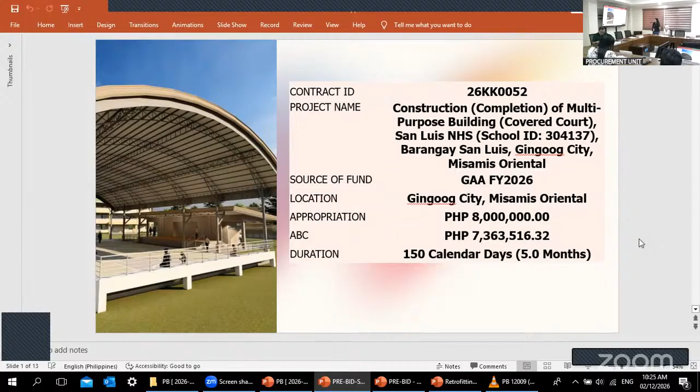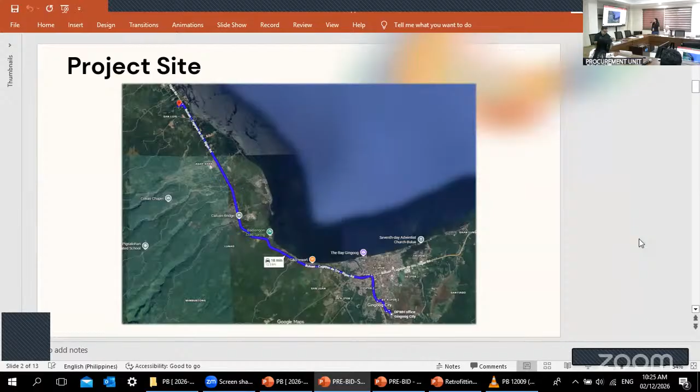Next, please. This is the project site, approximately 12.3 kilometers away from the DPWH office. Here is the site development plan and site photos. As you can see, there's an existing covered court, and the gutters and downspout are damaged.

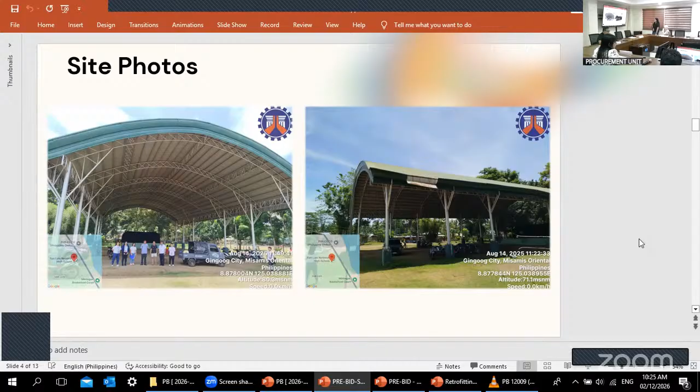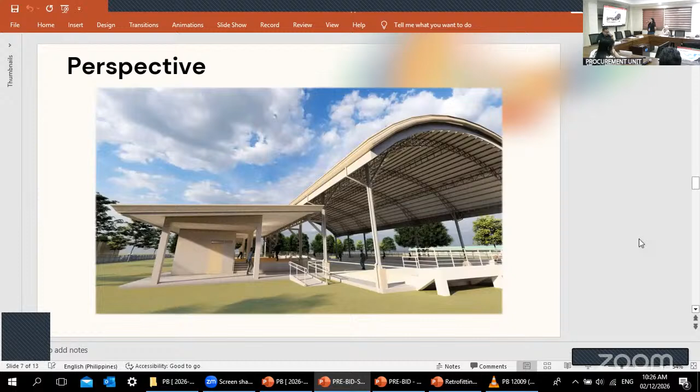For the project scope: for the existing covered court, we have construction of slab on grade, concrete drainage canal, rubber-based coating for the slab, and removal and replacement of damaged PVC downspout and GI gutter. For construction of the stage, complete structural members including reinforced concrete footings, columns, beams, and slab, roof trusses and roof sheets including all roofing accessories, fascia frame, fascia board, gutter, downspout, and flashings, complete masonry works, and semi-gloss painting finish on columns, beams, and stage walls.

Complete doors and windows, complete ceiling works, complete ramp with railings, complete tiling works, complete septic tank, complete plumbing and sanitary works, and complete electrical works. For the bleachers, we have complete structural members, reinforced concrete footings, columns, beams, and bleacher slab, rubber-based coating for the bleacher slab, and complete stainless steel railings.

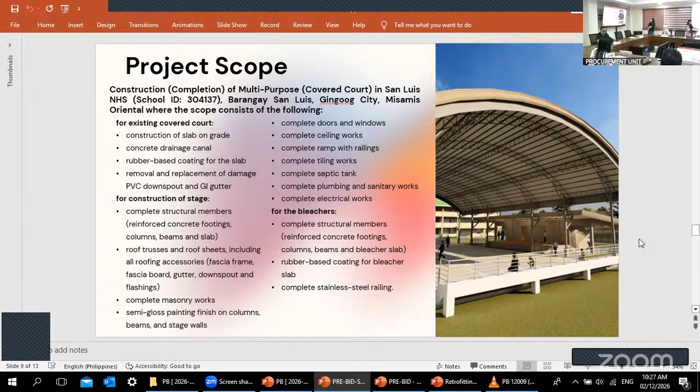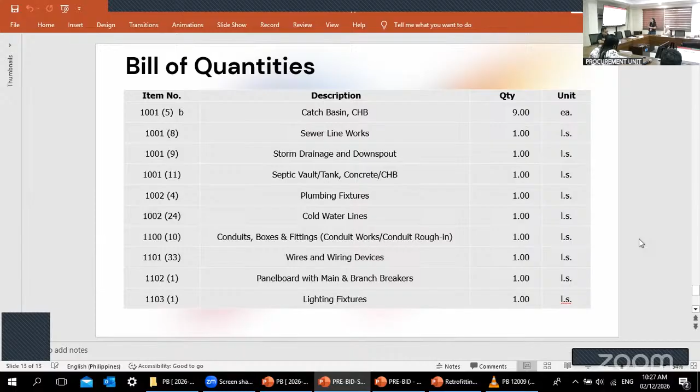So these are the bill of quantities. That would be all for this project. Are there any questions or clarifications from our YouTube viewers? Done. It's done, so we proceed with the other.

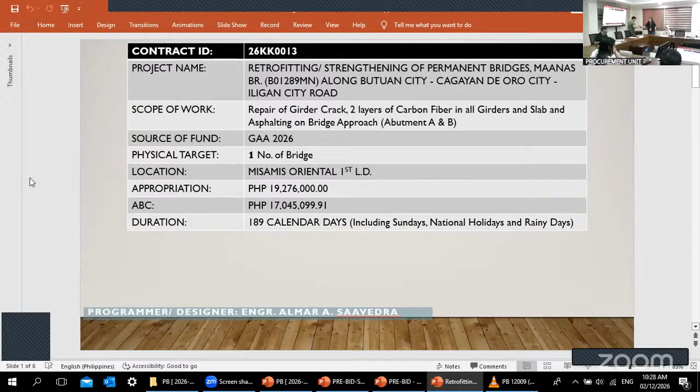As for the next project, we have 26KK0013, retrofitting and strengthening of permanent bridges, Maanas Bridge, Bridge ID B01289, along Butuan City-Cagayan de Oro City-Iligan Road. The scope of works includes repair of girder crack, 2 layers of carbon fiber in all girders and slab, and asphalting of the bridge approach. The appropriation is 19,276,000 with an approved budget cost of 17,045,099 pesos and 91 centavos, with a duration of 189 calendar days, which includes Sundays, national holidays, and rainy days.

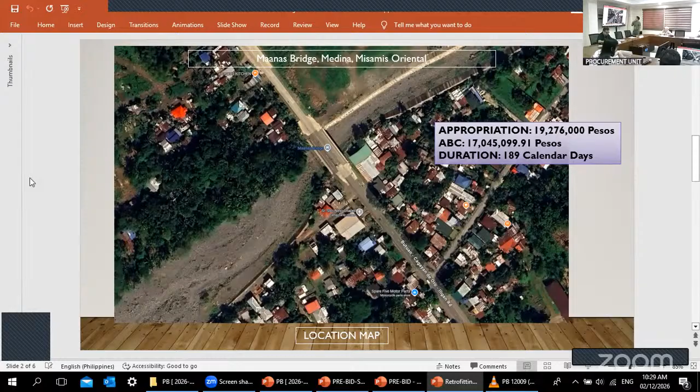Next, please. This is our Maanas Bridge located at Medina, Misamis Oriental. These are the photos taken during the survey and validation. As we can see, there are cracks that need to be repaired through epoxy structural concrete injection. We also have some girders and slabs that need to be strengthened using carbon fibers, carbon fiber plates and sheets.

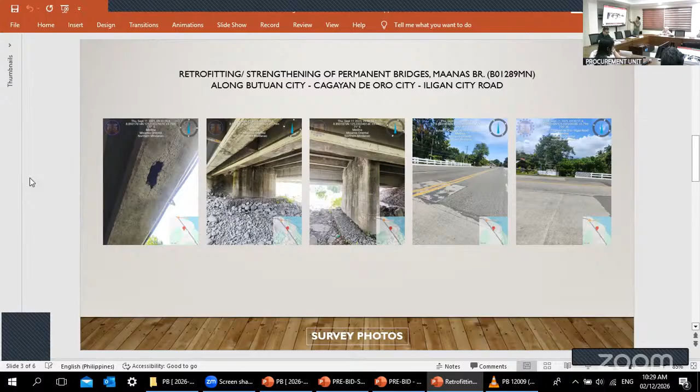Next is the asphalting of the approaches. As for the specifics, the girder cracks will be repaired using structural concrete epoxy injection, and there will be asphalting of the bridge carriageway, which is the center lanes of the bridge. There will also be asphalting of the bridge approach at stations 1327 plus 750 up to 1327 plus 864, and 1327 plus 903 up to 1327 plus 970.

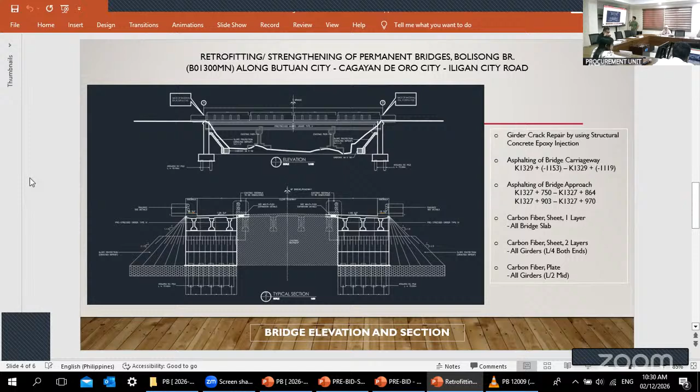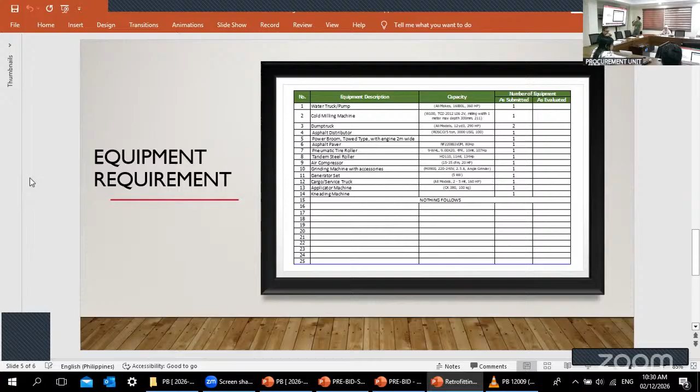For the carbon fiber, we will use one layer of sheet for all bridge slabs, and for the girders, 2 layers of carbon fiber sheet plus carbon fiber plate. Next, please, these are the equipment requirements for this project. And these are the specific bill of quantities.

So first, for the civil works, we have project billboard and signboard, occupational safety and health, traffic management, mobilization, demobilization, general scaffolding and shoring for the installation of the scope of works under our bridge, and removal of actual structures and obstruction, 0.1 meter thick ACP, the damaged asphalt on the bridge carriageway, and removal of the asphalt. Next is the emulsified asphalt, bituminous concrete surface wearing course.

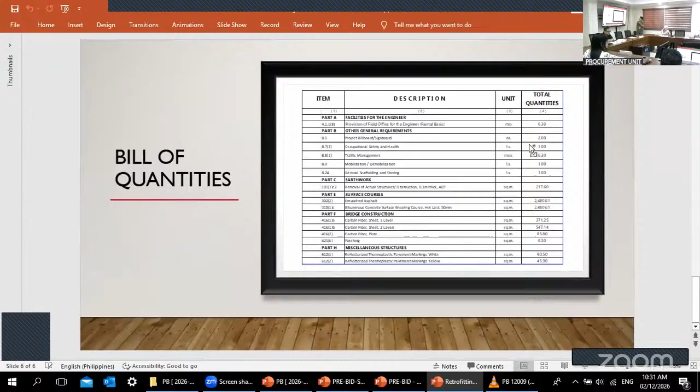We have carbon fiber sheet, 1 layer for the slab and 2 layers for the girders, and carbon fiber plate also for the girders. This item, patching, applies to the structural concrete epoxy injection. We also have reflectorized thermoplastic pavement markings, white and yellow, for the bridge asphalting. So that would be all for the project.

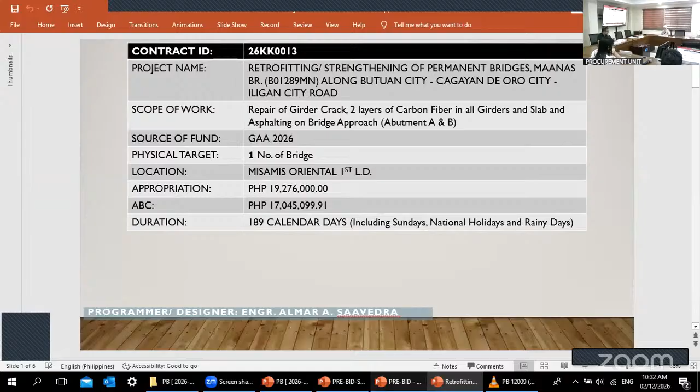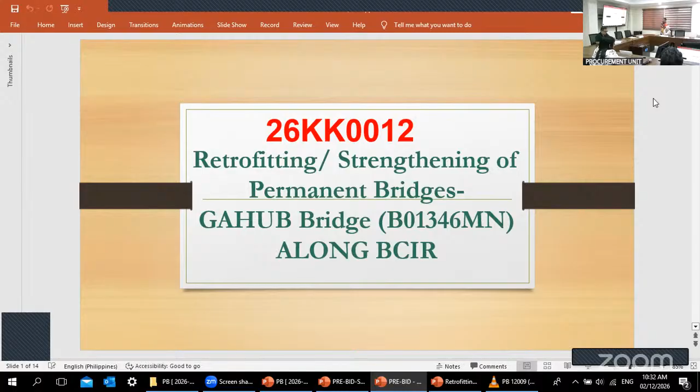Good morning, everyone. For the project 26 KK 0012, retrofitting and strengthening of permanent bridges, Gahub, B01346MN along BCIR. For the location, Gahub Bridge is located at Gingoog City.

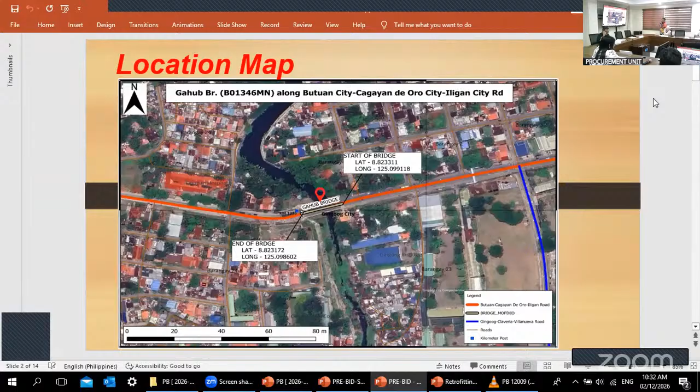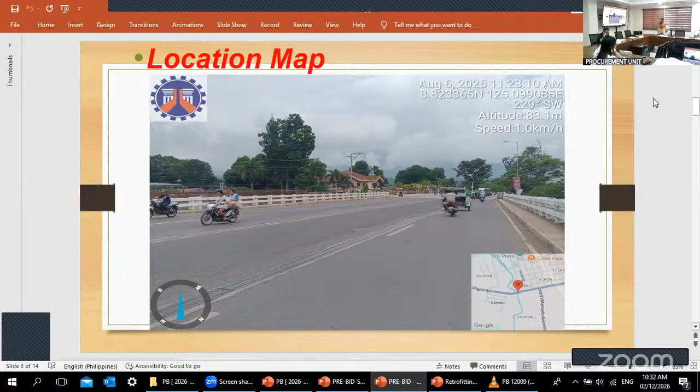This is the picture of the Gahub Bridge for our repair. For the bridge length, it is 62.67 meters with an appropriation of 19,276,000 and ABC of 17,192,508.43. Project duration of 143 calendar days, source of fund GAA.

This is our scope of works. We have carbon fiber at the center lane, carbon fiber sheets, and carbon fiber plates.

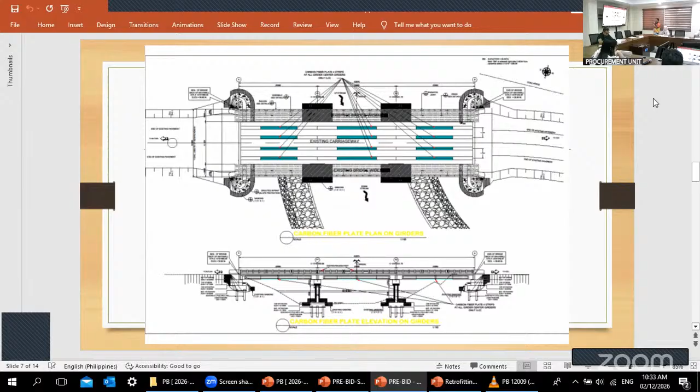We have also carbon fiber sheets at center, at the center on the slab. This is the carbon fiber plate for girders at the carriageway. This is the section for the carbon fiber sheets on slab, 1 layer.

Then carbon fiber sheets on center girders, 1 layer, L over 4 at both ends. And carbon fiber plates, 4 strips at all girders, center girders only.

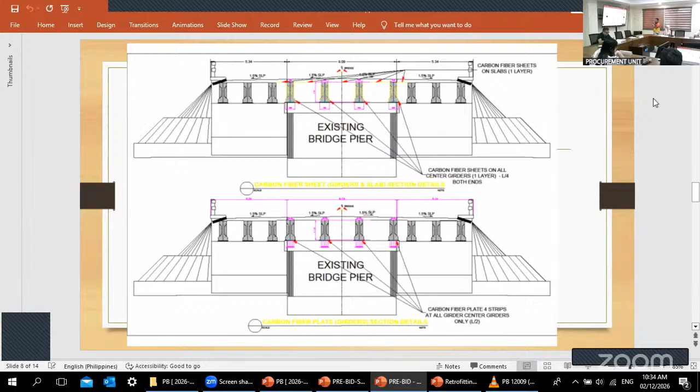The next scope of work is removal of asphalt, 0.05 meter thick, as we can see, at the tolling on the carriageway of the bridge, with a width of 10.6, length of 62.67, and approach A length of 168 meters and width of 15.6.

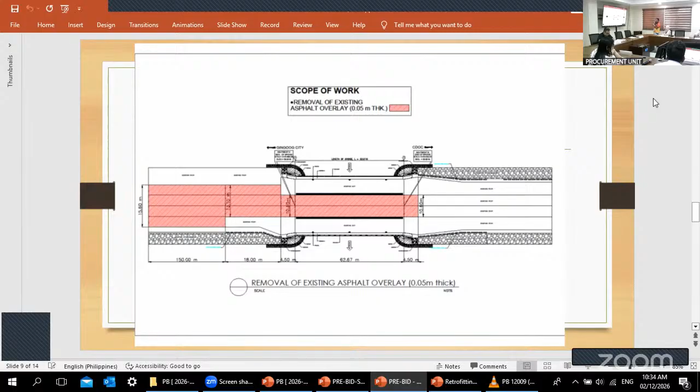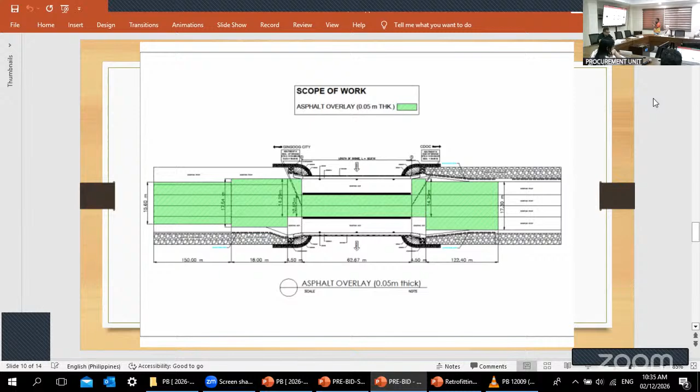Also a scope of work of asphalt overlay, tolling on the carriageway of the bridge, then approach of 122.4 on approach B, and approach A of 168 meters.

The next work is PCCP shoulder with a length of 65.7 meters, 2 meters width, and wheel guard installation of 27 units.

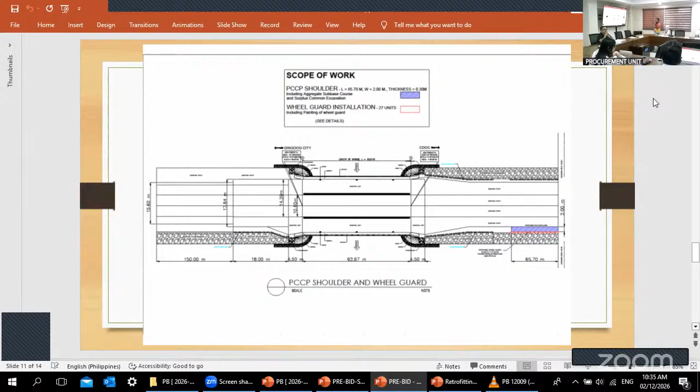Also scope of work of reflectorized pavement markings with a length of approach A 172.5 meters and 62.67 on the bridge, and approach B of 126.9, with thermoplastic yellow and white.

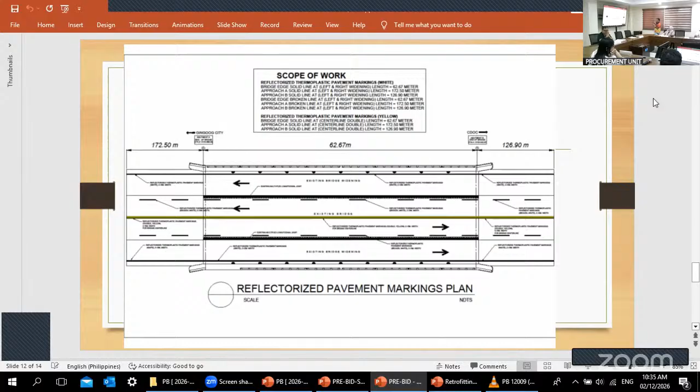This is the item of works: field office for the engineer, project billboards, occupational safety and health, traffic management, mobilization, demobilization, general scaffolding and shoring, removal of actual structure obstruction 0.05 meter thick asphalt, surplus common excavation, aggregate subbase course, emulsified asphalt, bituminous surface, concrete surface wearing course 50 mm, PCCP, unreinforced 0.3 meter thick, paint, carbon fiber sheets 1 layer, carbon fiber plate, stone masonry, reflectorized pavement markings white and yellow, and lastly concrete joint sealant, hot poured elastic type.

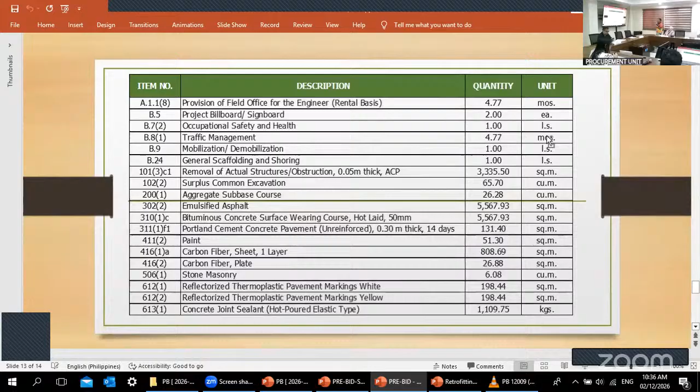That's all. Thank you.

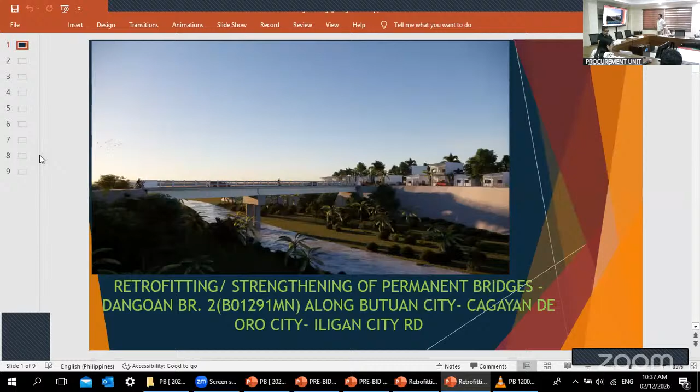Next project, retrofitting and strengthening of permanent bridge, Dangoan Bridge 2, along Butuan, Cagayan de Oro, Iligan Road. With contract ID of 26 KT 0010, bridge length 52.5 meters, located at Misamis Oriental, with appropriation of 19,276,000, ABC of 17,150,272, duration of 160 calendar days including Sunday, national holiday, and rainy days.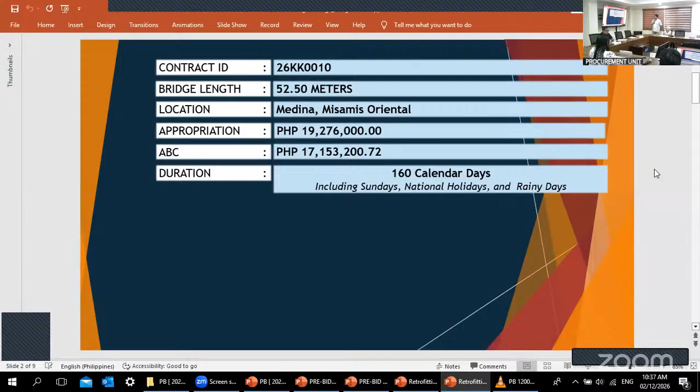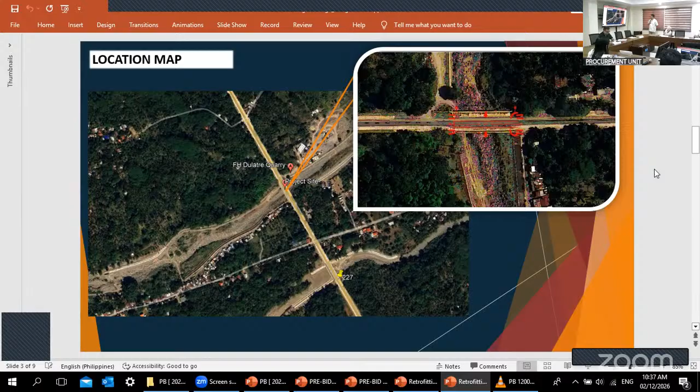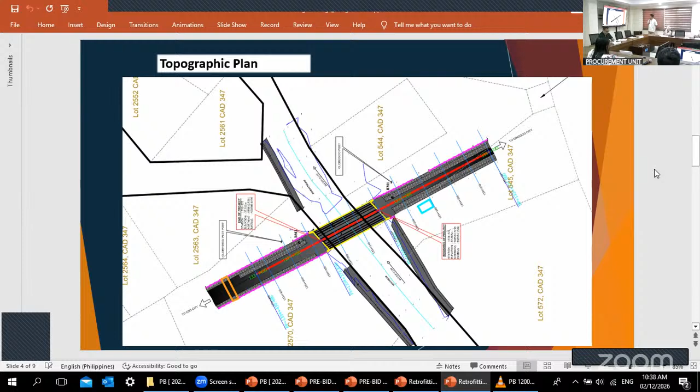This is the location of the project near Dulatre Quarry. This is the topographic plan, the yellow one is the Dangoan Bridge 2. This is the scope of the project, the blue one is the girder.

So for this bridge, there are 3 spans. Only 6 girders have 2 layers of carbon fiber sheets, then 1 strip of carbon fiber plate.

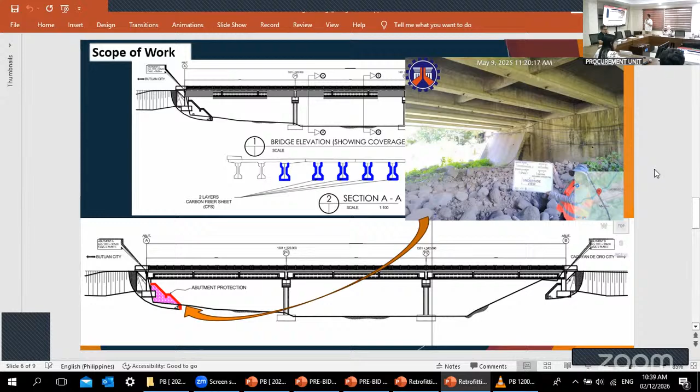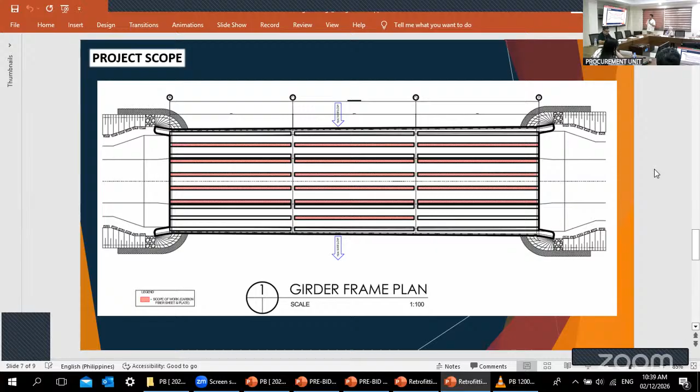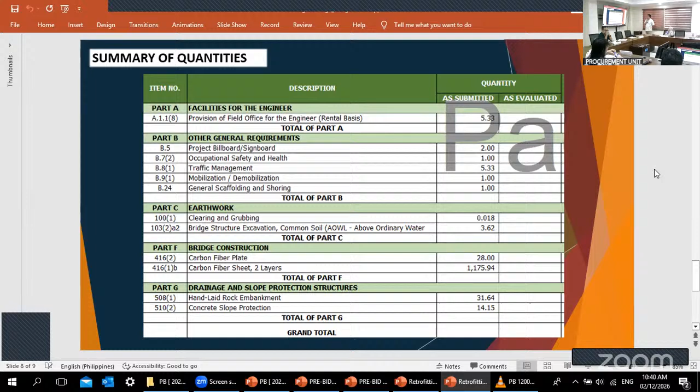So these are the quantities for civil works: clearing and grubbing, bridge structure excavation, carbon fiber plate, carbon fiber sheets 2 layers, hand-laid rock embankment, and concrete slope protection. These are our pictures taken at the bottom of the bridge, underneath, and on top - Dangoan Bridge 2, Station 1331 plus 321. That's all. Thank you.

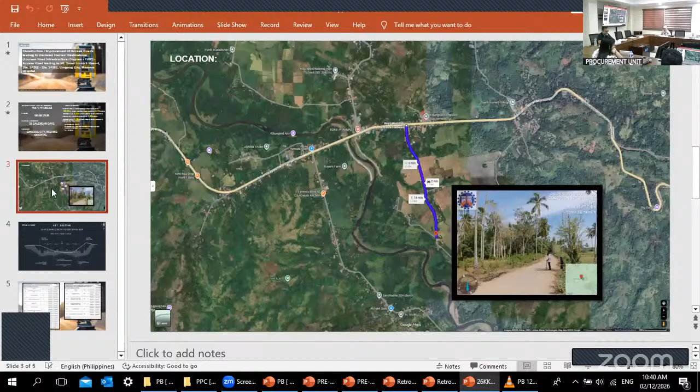The next project is 26-0015, construction improvement of access roads leading to declared tourism destinations. Tourism road infrastructure program 3, access road leading to Mount Sioan Resort, Station 3 plus 262 to Station 3 plus 362, Gingoog City, Misamis Oriental.

With the ABC of 4,144,285.68. The length is 100 linear meters. Contract duration is 50 calendar days. Location is Gingoog City, Misamis Oriental.

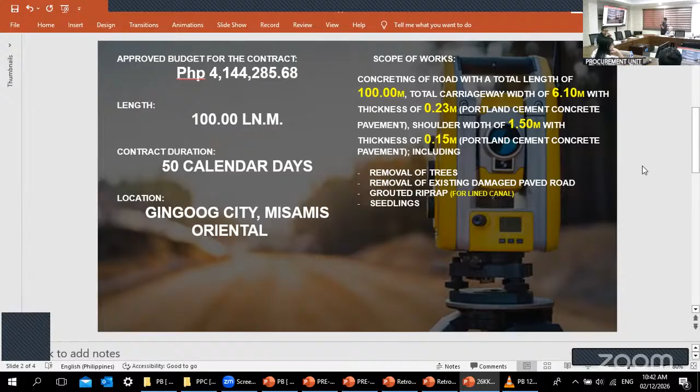The typical cross-section is full throughout the project. We have 3.05 plus 3.05 for the carriageway, 1.5 meters left and right for shoulders, then canal on both sides.

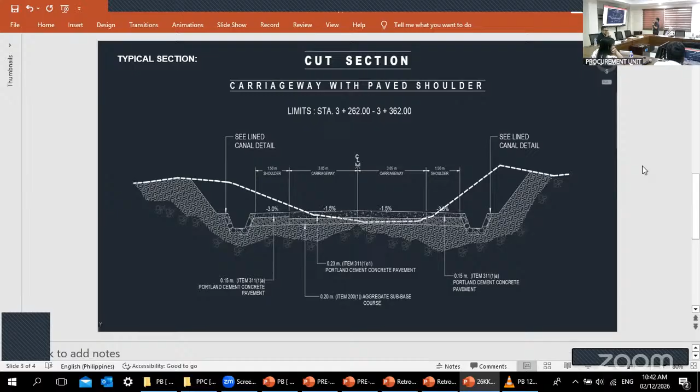So we have the bill of quantities. We have 1.67 months for field office for the engineer. Billboard is 5. Traffic, 1 lump sum. Removal of trees, 6 pieces. Removal of existing damaged paved road is item 101.

Surplus common excavation, item 102. Embankment, item 104. Item 105, preparation of subgrade. Aggregate subbase course, item 200. Item 311(1)a for the shoulder. 311(1)c1 for the main carriageway. And item 505 for the lined canal. Then item 611 for the seedlings.

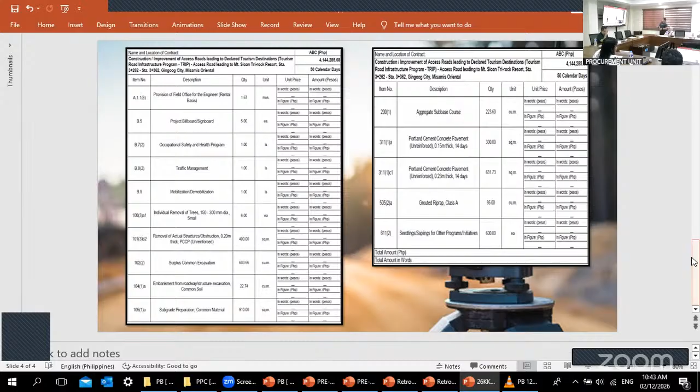Okay, thank you, Engineer Daguimol.

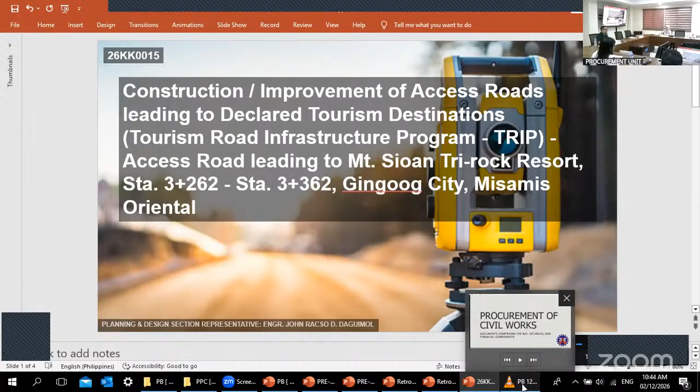Since we are done with the scope of the project, before we proceed with the documents of the technical and financial component for the checklist, any questions from our interviewer? Still none, so since there's no question, okay, we proceed with the technical and financial component.

Documents comprising the bid: technical and financial components. For the eligibility requirements, bidders are required to submit the following documents.

First, a PhilGEPS certificate of registration under platinum membership. Second, a statement of all ongoing government and private contracts. Third, a statement of the bidder's single largest completed contract or SLCC. Fourth, the bidder's computation of the net financial contracting capacity or NFCC. Finally, for joint ventures, a joint venture agreement or JVA in accordance with Republic Act number 4566, otherwise known as the Contractor's License Law, and its implementing rules and regulations.

Please be reminded that failure of the bidder to update their PhilGEPS certificate of registration with current and updated supporting documents shall result in the automatic suspension of the bidder's certificate.

For the single largest completed contract, or SLCC, the bidder must have completed a contract similar to the project we bid. The value of the SLCC, adjusted to current prices using the PSA consumer price indices, must be at least 50% of the approved budget for the contract to be bid. However, contractors under small A and small B categories who do not have similar experience may still be allowed to bid, provided that the cost of the contract does not exceed the allowable range of contract cost of their registration, in accordance with PCAB guidelines.

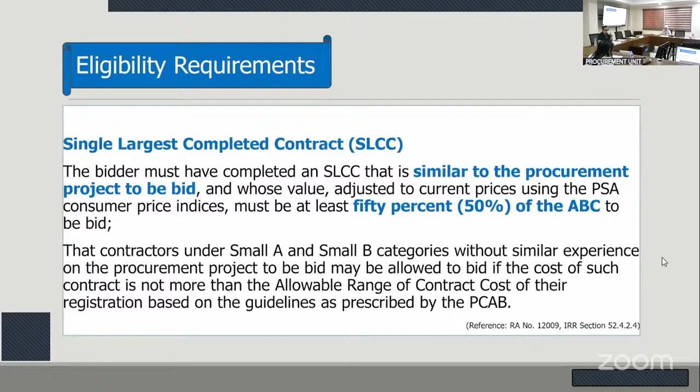Please note that the SLCC must be supported by an owner's certificate of final acceptance issued by the project owner other than the contractor. Alternatively, a final rating of at least satisfactory in the CPES or a similar performance and monitoring system may be submitted. For contracts with the private sector, an equivalent supporting document shall be required.

For the net financial contracting capacity, or NFCC, the bidder's computed NFCC must be at least equal to the approved budget for the contract to be bid. The NFCC is calculated using the prescribed formula, as shown. The values of the current assets and current liabilities of domestic bidders shall be based on their latest audited financial statements.

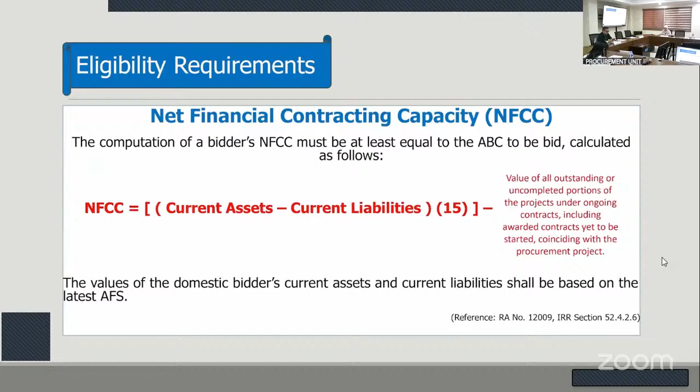Joint ventures may participate in the bidding process, provided that the primary purpose of each member is similar or related to the requirements of the project. Each member of the joint venture shall be jointly and severally liable to the procuring entity in case of any breach or failure to comply with the project requirements.

For the submission and receipt of bids, each bid shall consist of two components: the technical component and the financial component.

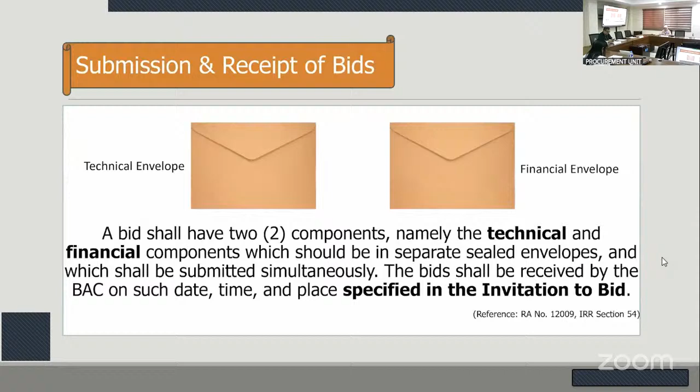These components must be placed in separate sealed envelopes and submitted simultaneously. Bids shall be received by the Bids and Awards Committee, or BAC, on the date, time, and place specified in the invitation to bid.

The first bid envelope shall contain the technical documents, which must include at least: a PhilGEPS certificate of registration under Platinum membership; b, PCAB license and registration in case of a joint venture; c, statement of all ongoing government and private contracts; d, statement of the single largest completed contract, or SLCC; e, computation of the net financial contracting capacity, or NFCC; f, joint venture agreement if applicable; and g, bid securities in the prescribed form, amount, and validity period.

H, project requirements, which shall include the following: 1, the organizational chart for the procurement project to be bid; 2, the list of contractors' personnel, for example project manager, project engineers, materials engineers, and foremen, to be assigned to the project, along with their complete qualifications and experience.

3, the list of contractors' major equipment units, whether owned, leased, or under purchase agreements, supported by proof of ownership or certification of availability from the equipment lessor or vendor for the duration of the project.

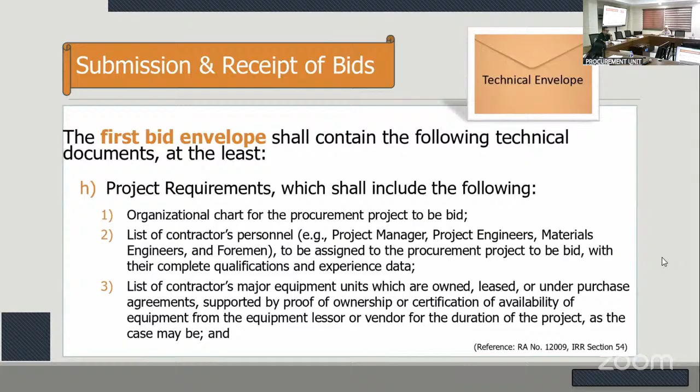4, omnibus sworn statement in accordance with section 54.3 of this IRR. 5, latest general information sheet, GIS, reflecting the beneficial ownership information, BOI, duly received by the Securities and Exchange Commission, SEC, for corporations. And 6, sworn affidavit of eligibility and beneficial ownership, following the template attached as Annex A for all bidders, including sole proprietorship.

The following forms are for your reference.

For bid security, all bids under competitive procurement methods must be accompanied by a bid security. The bid security serves as a guarantee that the bidder will enter into a contract if awarded the project. The bidder shall submit either a bid securing declaration or any form of bid security in an amount not less than the required percentage of the ABC.

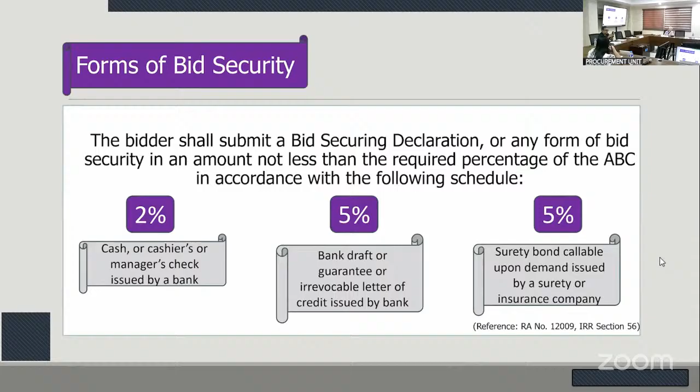According to the following schedule: cash, or cashier's or manager's check issued by a bank, 2% of the ABC; bank draft or guarantee or irrevocable letter of credit issued by a bank, 5% of the ABC; surety bond callable upon demand issued by a surety or insurance company, 5% of the ABC. The omnibus sworn statement must be executed by the bidder or by its duly authorized representative.

It should contain the requirements outlined in section 54.3 of the implementing rules and regulations of RA 12009.

Contractors' key personnel: the key personnel should meet the following number of years' work experience. The experience means total years of civil works experience of any nature in construction and engineering consultancy service. Include the tax identification number, or TIN, of the key personnel.

Compliance to DO 98 series of 2016, revised guidelines on the accreditation of contractors, consultants, materials engineer, and to include the contact number of the materials engineer. Compliance to DO 148 series of 2024, guidelines in the accreditation and assignment of contractors and consultants project engineer.

If a proposed key technical personnel is an employee of the bidder and working on another project at the time of the bidding, the bidder shall submit a certification that: 1, the personnel will be pulled out from the ongoing project once the bidder is awarded the contract; and 2, he or she will be replaced with another person with equal or better qualifications as certified by the head of the implementing office, pursuant to Department Order Number 9, Series 2012.

The proposed key personnel and replacement must be named in the bidding document. The following are the key personnel required: 1 project manager, with 5 years of general experience and 5 years of relevant experience.

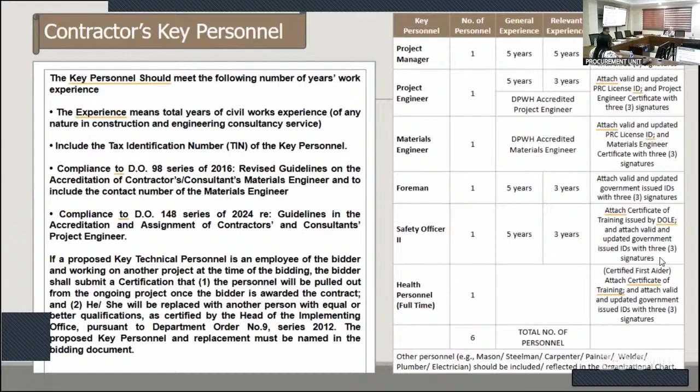For contractors' major equipment units, the contractor must provide proofs of ownership or other supporting documents for equipment that is owned, leased, or under purchase agreements. For leased or purchased equipment, a certificate of availability from the lessor or vendor must be submitted for the duration of the project. Proofs of ownership and supporting documents must specify model and year, capacity, performance or size, plate number, motor number, body number, chassis serial number, engine serial number, specific location and condition of the equipment.

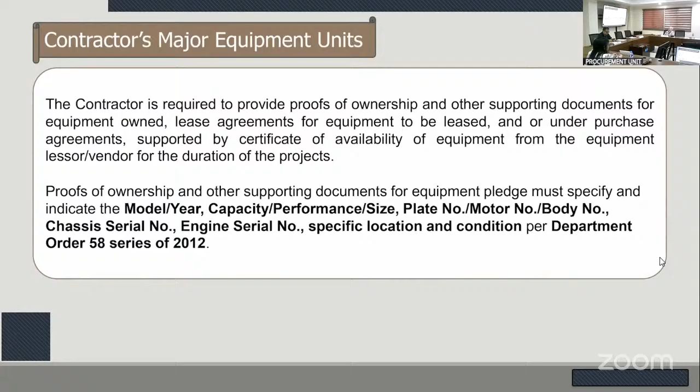These requirements are in accordance with Department Order 58, Series of 2012. For contractors' minimum materials testing equipment, refer to Department Order 11, Series of 2017 for the required equipment.

The second bid envelope shall contain the following financial documents: original of duly signed and accomplished financial bid form, original of duly signed bid prices in the bill of quantities, duly accomplished detailed estimates form including a summary sheet indicating the unit prices of construction materials, labor rates, and equipment rentals used in coming up with the bid, and cash flow by quarter.

Submission and receipt of bids. Bid submission may be done manually or electronically online. However, bidders should only select one mode of submission, either manual or electronic. The address for receipt of bids submitted manually is Back Conference Room, 3rd floor, DPWH MOFDEO, Barangay 26, Gingoog City, Misamis Oriental. For electronic submission, electronic bids Misamis Oriental 1 at dpwh.gov.ph.

Modification of bids. Bidders may modify their bid before the deadline for the receipt of bids. In case of modification, bidders shall not be allowed to retrieve their original bid, but shall only be allowed to send another bid, equally sealed, properly identified, linked to their original bid, and marked as modification and stamped received by the BAC. Withdrawal of bids.

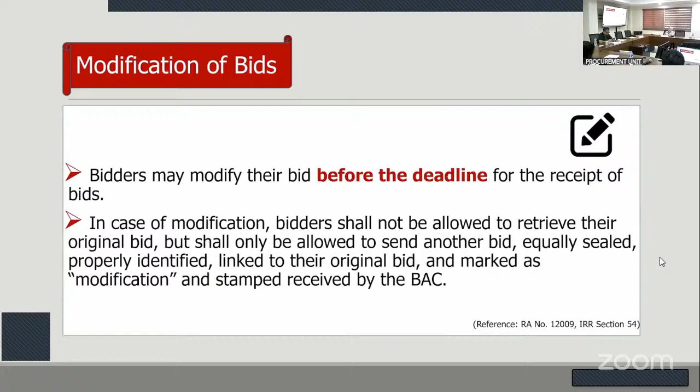Bidders, through a letter, may withdraw their bids or express their intention not to participate in the bidding before the deadline for the submission and receipt of bids. They shall no longer be allowed to submit another bid for the same contract, either directly or indirectly. Withdrawal of bids after the deadline shall be subject to appropriate sanctions.

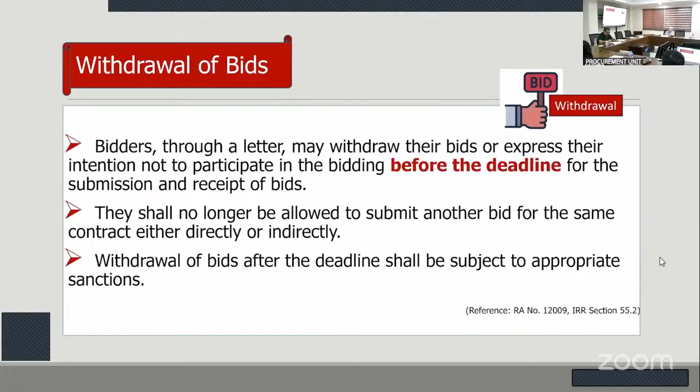The financial component of the bids of each passed bidder shall be evaluated using non-discretionary criteria, including arithmetical corrections for computational errors, and thus determine the correct total calculated bid price. The BAC shall automatically disqualify any total calculated bid price which exceeds the ABC.

The following factors are to be considered in the evaluation of the bid prices. Completeness: no price for a required item due to the government, indicating a 0 or a dash, is free to the government, and all prices are deemed to include all taxes. Bids not addressing or providing all of the required items in the bidding documents, including where applicable the BOQ, shall be considered non-responsive.

Arithmetical corrections: bid prices in figures versus words, words prevail. Total price per item versus unit price for the item as extended or multiplied by the quantity of that item, the unit price as extended prevails. Stated total price versus actual sum of prices of component items, the actual sum of prices of component items prevails.

Unit cost in the detailed estimate versus unit cost in BOQ, unit cost in BOQ prevails. Amount in price schedule versus amount in bid form, amount in bid form prevails.

Post-qualification. Legal requirements: licenses, certificates, permits, agreements, and non-inclusion in blacklist. Technical requirements: key personnel, minimum work experience requirements should be satisfied, availability and commitment of major construction equipment and materials laboratory equipment, and performance in ongoing government and private contracts.

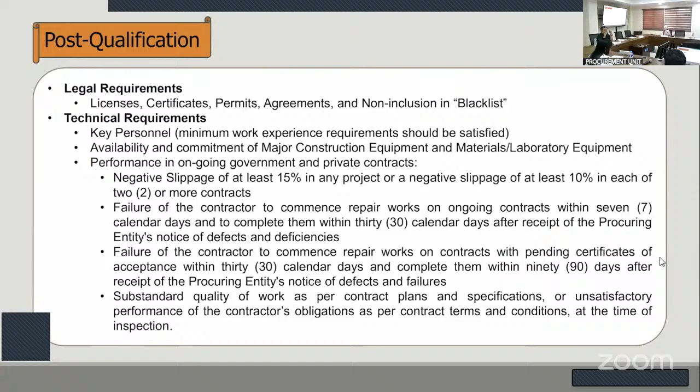Required committed line of credit in the amount specified and over the period stipulated in the bidding documents, when applicable. NFCC, within 5 calendar days from receipt by the bidder of the notice from the BAC that the bidder has the LCB, MEAB, MAB, or HRB, the bidder shall submit all eligibility documents supporting its PhilGEPS certificate of registration, platinum membership, its latest income and business tax returns filed for the preceding quarter, which should not be earlier than 2 quarters from the date of submission and receipt of bid, and other appropriate licenses and permits required by law. The BAC shall recommend to the HOPE the award of contract to the bidder with the LCRB after post-qualification. Within 10 calendar days from receipt by the winning bidder of the notice of award, certain conditions should be complied with before the contract may be awarded.

Submission of the following documents by the winning bidder: valid JVA if applicable, a valid PCAB license and registration for the type and cost of the procurement project to be bid, for foreign bidders in infrastructure projects when the treaty or international or executive agreement expressly allows submission of such license and registration as a precondition to the notice of award, or the SEC certificate of registration of the foreign corporation, or the SEC certificate of registration of the foreign consulting firm, or the authority or license from the appropriate government agency or professional regulatory body of foreign professionals engaging in the practice of regulated professions, where applicable. Posting of performance security by the winning bidder in accordance with Section 68 of this IRR, and signing of the contract by the parties.

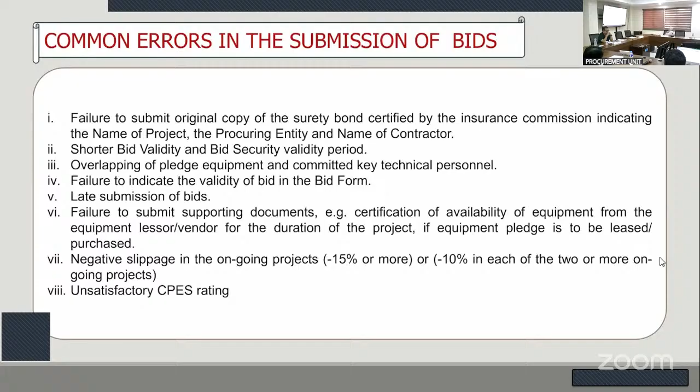Negative slippage in ongoing projects of negative 15% or more, or negative 10% in each of 2 or more ongoing projects; unsatisfactory CPES rating; incomplete pages of bid documents, technical and financial; authority of the signatory to sign on behalf of the bidder. For a single proprietor, the signatory should be the owner or proprietor only. For corporations or cooperatives, the board secretary certificate and board resolution are required. For joint ventures, the joint venture agreement; for partnerships, as indicated in the articles of partnership.

Additional information for our prospective bidders: these are the scheduled procurement activities for the presented project. For the deadline of issuance or downloading of bidding documents, the deadline will be February 26, 2026 until 8:30 a.m. Hard copies are available at the procurement unit for DPWH Misamis, and these bidding documents can be downloaded from the DPWH website and PhilGEPS website. For the receipt of bids or dropping of bidding documents, the deadline will also be February 26, 2026 until 10 a.m. The schedule for the opening of bids will be February 26, 2026, immediately after the submission of bids.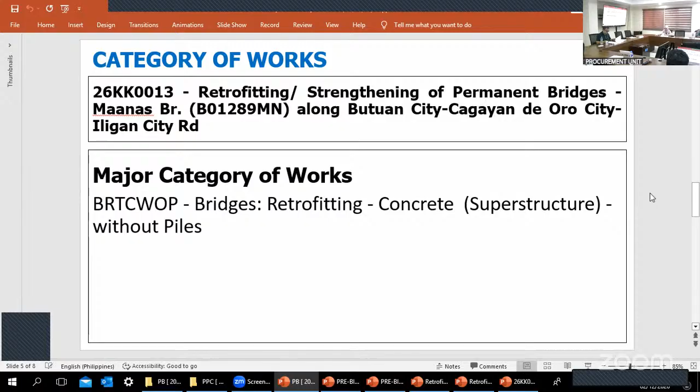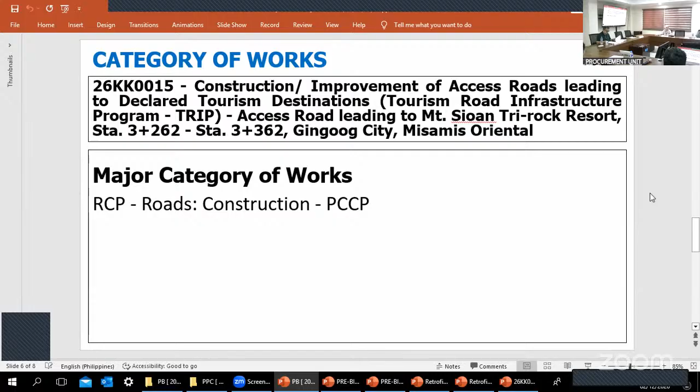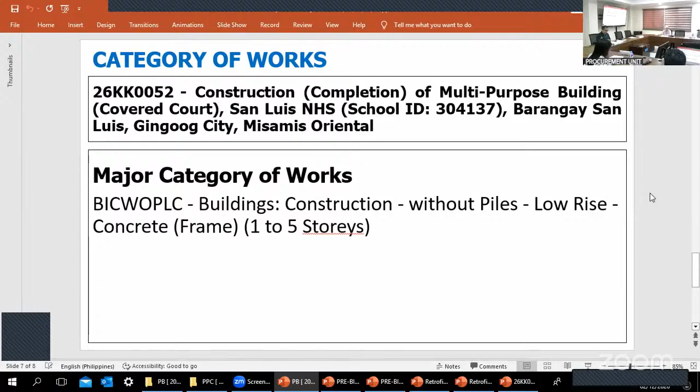For the required particular report: for 26KK0011, the required particular report is BRTCWOP, or Bridges Retrofitting Concrete Superstructure without piles. Same for 26KK0012, the required particular report is BRTCWOP. Also for 26KK0013, the required particular report is BRTCWOP. For 26KK0015, the required particular report is RCP, or construction for PCCP. And for 26KK0052, the required particular report is BICWOPLC, or Buildings Construction without piles, low-rise concrete frame for 1 to 5 stories.